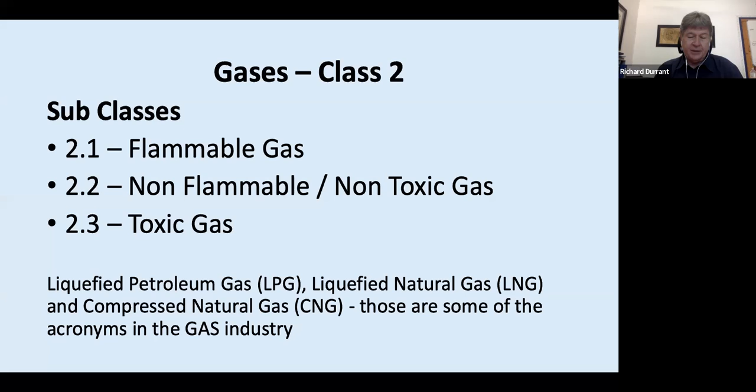And then there's the compressed natural gas, which is when you take the liquefied gas and you compress it, you put it into a container, for use in motor vehicles and other activities such as that. So those are just some of the different types of gases.

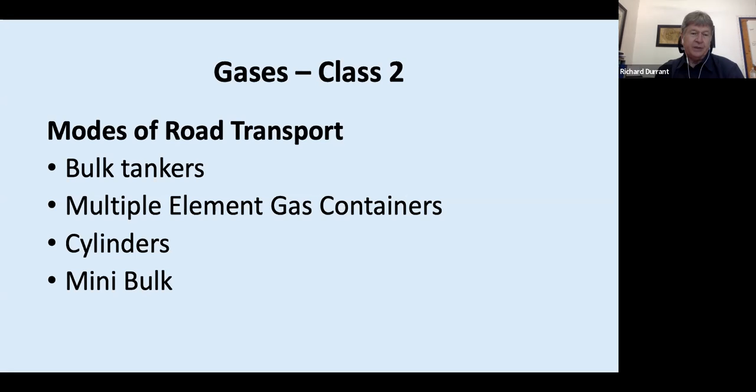They have an agreement with a company that actually builds the tankers, so they don't build the vessel. That vessel is built, and then it is taken by Tank Clinic and put onto the vehicle, onto the trailer, onto the axles. And then Tank Clinic sells it as a Tank Clinic tanker, but it's two manufacturers that build the equipment, and Tank Clinic puts it all together into the vehicle. Also very good quality. Cost-wise, probably a little bit cheaper than the imports. I don't know offhand what the costs are, but...

this vessel is designed as a high pressure vessel, and it's built from, I think, 12 or 15 millimeter thick steel, and they can hold up to I think 2000 something kPa, kilopascals - so very, very high pressure. All the pipe work is designed to operate at very high pressure. So it is really a work of art and a work of engineering.

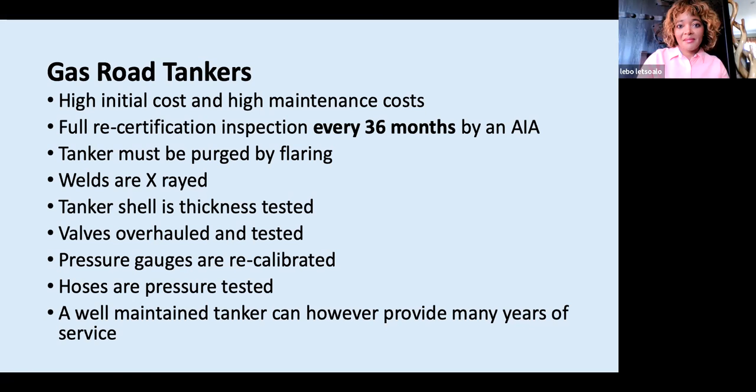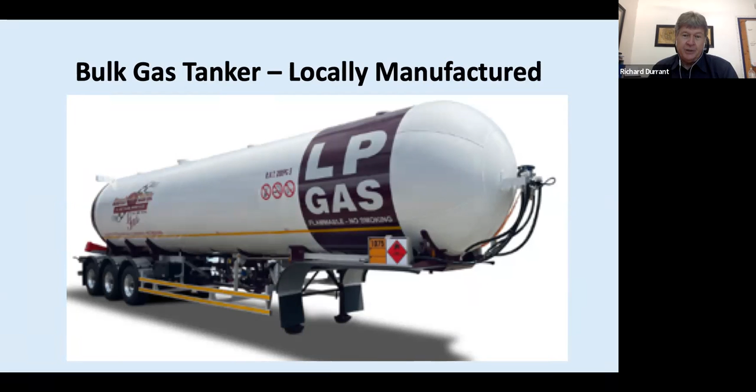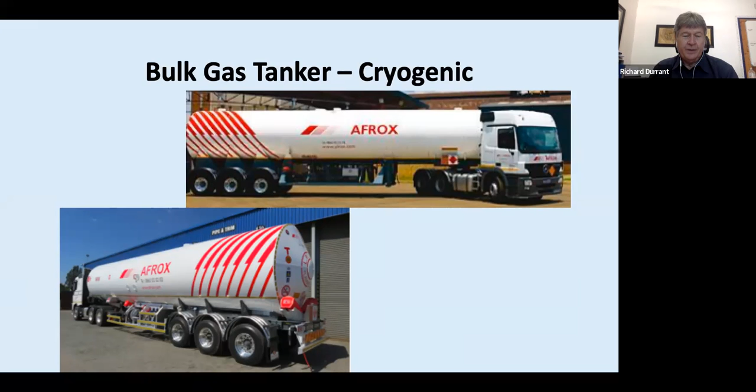Where these ones actually have got a similar vessel inside the cladding, but they have got an insulated exterior, insulated with a fiberglass type material, because some of these materials or gases that are transported in these tankers are at minus 150 degrees centigrade and more. So things like nitrogen, I think I've got a list of some of them.

So yeah, cryogenic means that it's running at a very, very low temperature. So the cryogenic liquefied gases are also known as refrigerated liquefied gases, and are commonly called cryogenic liquids. So the colder it gets, depending on the product, it then turns into a liquid. But as soon as you start releasing the pressure and the temperature, it then turns back into a gas.

And then cryogenic gases are cryogenic liquids that have been vaporized and may still be at a very low temperature. Cryogenic liquids are used for their low temperature properties, or to allow larger quantities to be stored or transported. So the cryogenic liquid can be used as a refrigerant as well. They are extremely cold with boiling points below minus 150 degrees. So they will boil at minus 150 degrees.

So extremely, extremely cold. Some examples are carbon dioxide and nitrous oxide, both of which have higher boiling points, and are sometimes included in this category. I must say up front, I'm not a cryogenic expert. It is a very specialized field. Afrox, Pure Gas, Air Liquide, these sort of companies are transporting cryogenic gases. It's just an example of a different type of gas and a similar tanker, but different.

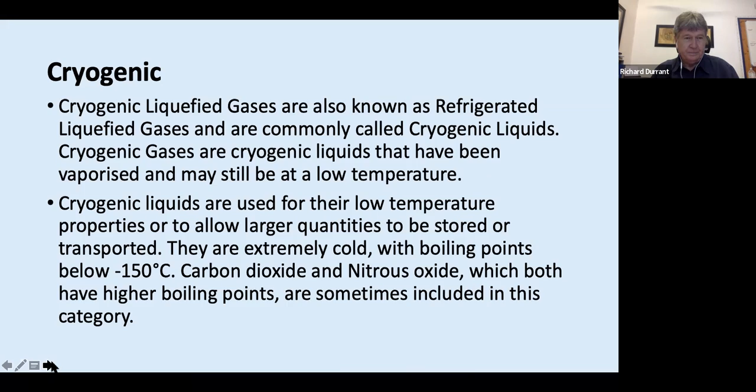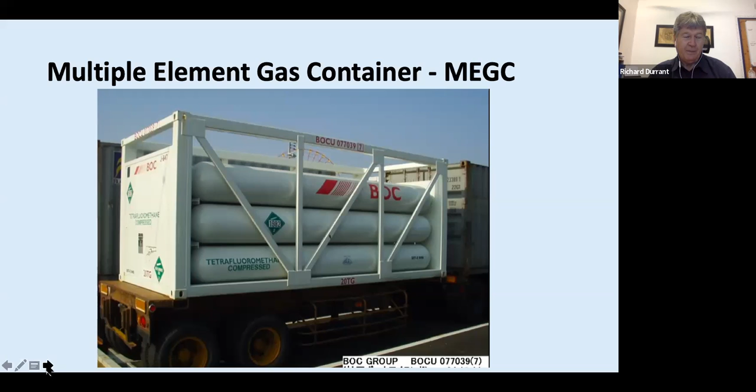So, as I mentioned earlier, one of the most popular gases that most of us have had some dealings with is liquefied petroleum gas, LPG, which has the United Nations number of 1075. And LPG is a mixture between butane and propane. Both of them are flammable gases. And I'm not a chemist, but they mix them depending on the qualities of the butane and propane, and together they mix into liquefied petroleum gas.

And some of the dangers of LPG and of a lot of these gases are that the vapors are heavier than air, and it'll spread along the ground and collect in low confined areas. So if there is an LPG leak, you can't see LPG. It's clear. You can smell it, but I'll touch on that just now. The vapors will drop onto the ground, and they will flow along the ground and go into drains and low areas.

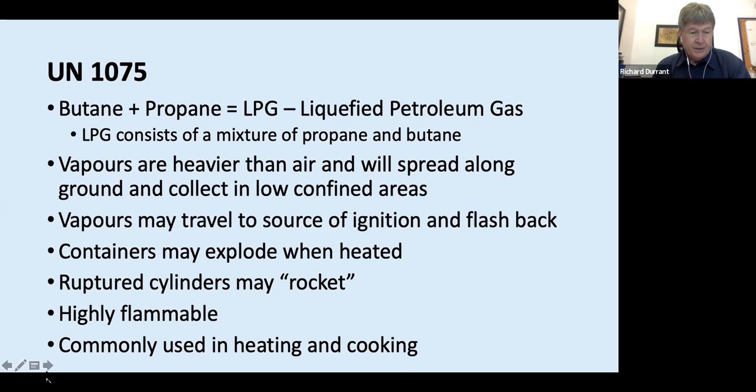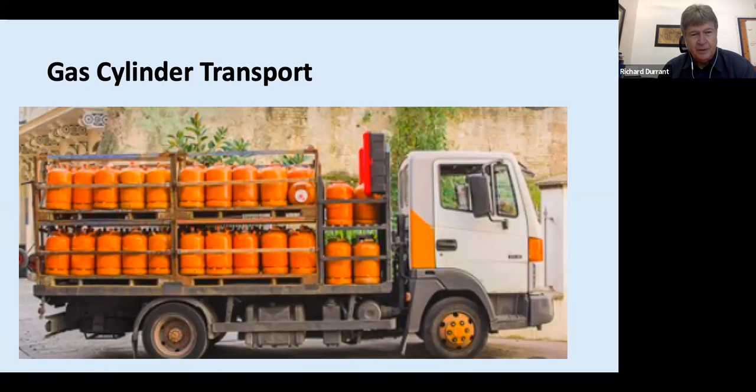There's no placarding on this vehicle. As we discussed at the last session, each vehicle must have placards on showing that it's carrying LPG with a UN 1075 number on it, etc. But that's quite a good example of smaller gas cylinders being transported.

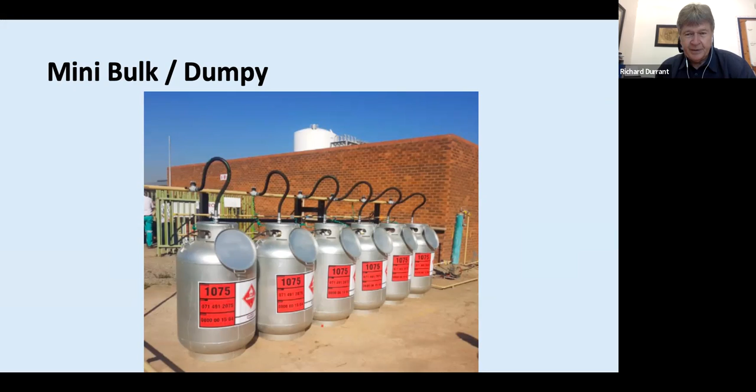But again, you'll see on these, they've got a foot, they've got a ring around the foot, around the base, which keeps the tank off the ground. And it's got a protection ring around the top, where the pipe couples into the cylinder. The valve itself is below that protection ring to, again, protect it from being knocked off. And I see these ones have got a lid that you can close over as well for further protection. So a very neat installation.

So if you are interested in getting into LPG, some of the background to LPG in South Africa, the availability. There are 6 fuel refineries in South Africa, of which 5 of them produce LPG. So there's a refinery in Cape Town, 2 in Durban, 1 in Secunda, 1 in Sasolburg. The only one that doesn't produce LPG is the Natref refinery in Sasolburg. Otherwise, all the other 5 produce LPG in various quantities.

So the article that I found says that those 5 refineries produce about 80% of the LPG consumed in South Africa, while the remainder is imported to compensate for the shortfall. My personal opinion is in fact the local refineries are not producing that much LPG anymore, and it's going to become more difficult because the Engen refinery in Durban, or Enref as they call it, is going to stop being a refinery. It's going to just be a storage facility for imported fuel. So they may be importing LPG as well.

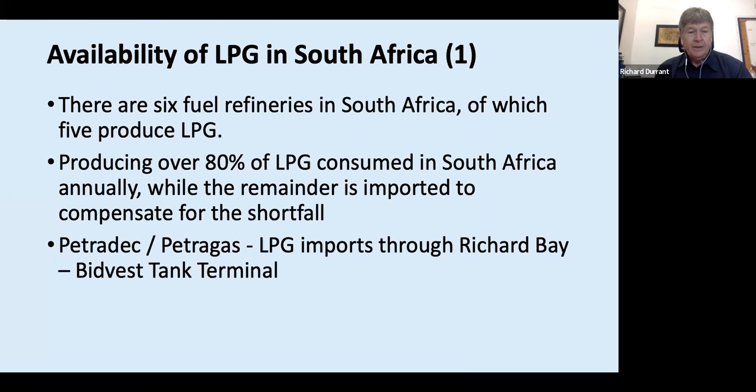Some of the others, and I'm not sure where they all get the gas from, Oryx, Easigas, Afrox, are purchasing LPG and marketing LPG. Afrox, I think they also produce some of their own LPG. Handigas is their brand, very well-known brand. Handigas has almost become a generic name for LPG. Afrox is the largest wholesaler and distributor of LPG in South Africa, that they distribute under their own brand, under their own name. Easigas is owned by a European company. Oryx is also a European company. So they are wholesalers and distributors of LPG in South Africa.

Then there's a very successful company, you may be aware of them, WASSA Gas. They're situated in Kya Sands in Johannesburg. A black woman-owned distributor of gas, has done very well. And if you want to get into the gas business, I suggest you go and talk to the owner of WASSA Gas. She can tell you some of the pros and cons of it, because she's had lots of experience. I, in fact, as a SQAS auditor, audit her operations, so I know the operation very well and it is very well run.

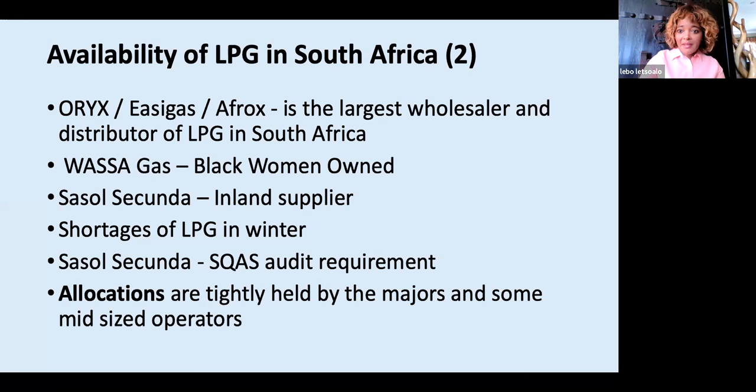Right, let's continue. So you might say, well, this is all around safety. But as I said right at the beginning, safety is critical. So that's why I'm spending so much time on safety. Transportation and handling of gas cylinders. Do not allow cylinders to slide or come into contact with sharp edges. As I said earlier, if that vessel, that tank, that cylinder gets damaged and gets punctured, you're going to have a leak, and that can be catastrophic.

Do not allow cylinders to overhang the side of transport vehicles. Again, if there's a side swipe or something like that, you bump into a wall, you're going to damage the cylinder. Do not drop cylinders or allow them to come into violent contact with each other or other hard objects. So with that picture of the industrial cylinders, they're all in those cages. They're all strapped into those cages so they don't rattle around and bump into each other.

Do not load or offload cylinders by means of electromagnetic cranes or chain slings. So again, chain slings can slip, etc. Make sure that if you are going to use mechanical means to lift them, that they are fail-safe. Electromagnetic cranes are not common, but if something fails and the magnet stops being a magnet and you drop a cage of cylinders, it's going to be a big problem.

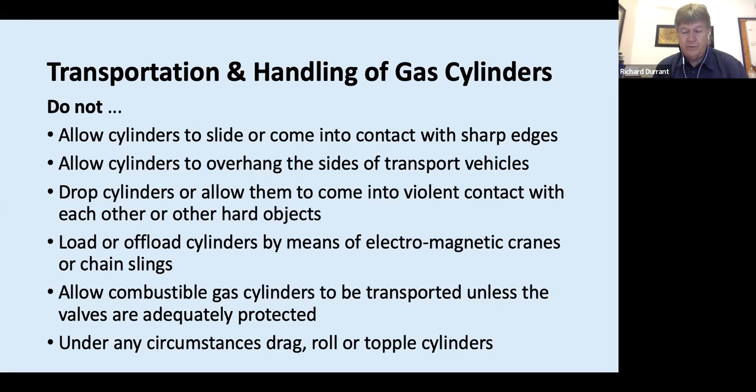Don't allow combustible gas cylinders to be transported unless the valves are adequately protected. I mentioned to you earlier the different ways of protecting, the rings or the caps on top of the cylinders; make sure they're always in position. And under no circumstances drag, roll, or topple cylinders. I've seen cylinders being rolled off the back of a truck and landing on the ground. You really don't want to do that, because all you need is that cylinder to get damaged or the valve to get knocked off, and then you've got the cylinder that's flying around.

Some of the do's: ensure that the cylinders are properly secured during transport. We've said that a few times now. Transport cylinders properly secured in a vertical position with the valve uppermost. So even if you're transporting 1 or 2 cylinders on the back of a bakkie, make sure that they're in a vertical position and they are tied to the headboard of the bakkie to stop them moving around. Keep dirt, oil, and other foreign matter out of the valves and safety devices.

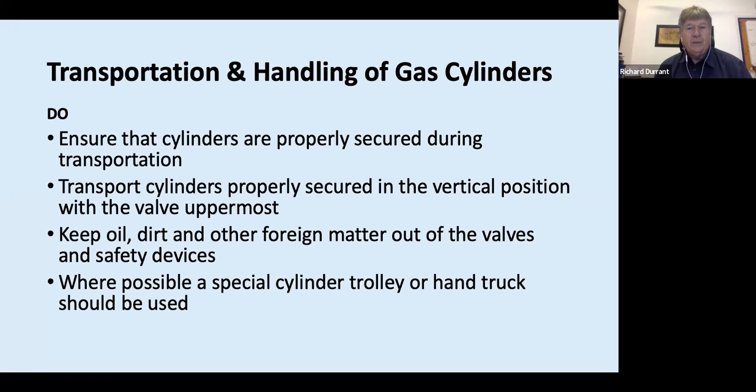And where possible, a special cylinder trolley or hand truck should be used when you're moving cylinders around. It's not that easy. They're very heavy and awkward, so you can hold them at 45 degrees and roll them on the ring at the bottom, but all you need is somebody to slip, and then you drop that on the ground and there could be a problem. So where possible, use a trolley. This is again just a reiteration. It's all around safety when you're handling gas.

Stench additive. If you've ever used LPG, you may have smelt it; it's a very unpleasant smell. That is an additive that they put into the gas. As we say here, LPG is practically odorless and colorless, which makes leak detection difficult. So like I said, you can't see it. And if they didn't put in the stench additive, you wouldn't be able to smell it. The small amount of stench additive, ethyl mercaptan, is added before the LPG goes to the market. So it's added as a safety precaution. So if there is a leak, you will smell it. You can't see it, but you'll be able to smell it. At least you know that there's a leak.

So that's again a safety requirement. The additive is non-corrosive, non-toxic, and the odor can be smelt in very low concentrations of vapor. So yes, if you turn on your stove and you leave it for 5 seconds before you light it, you will smell that odor come through very quickly. So again, a safety precaution.

So that's really the bulk of my presentation. And apologies, but it's all around safety.

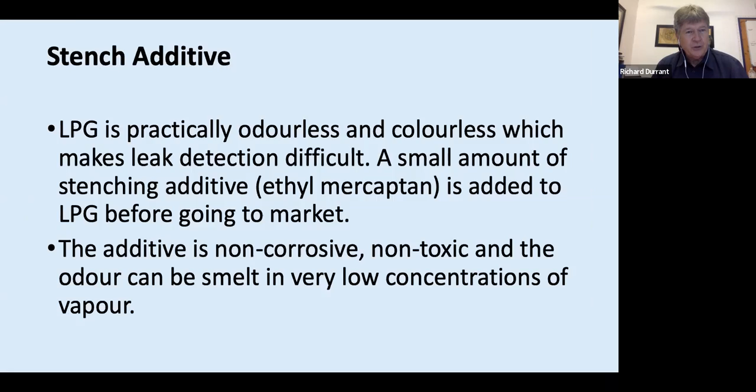But I've got 2 videos. I'm not sure if they're going to work, but we need to see whether I can get these to work. Otherwise, I'll have to distribute them. No, I don't think this is going to work.

The video was of a truck, an LPG truck, which was in the town of Worcester in the Western Cape in 2019, about 2 years ago. I don't know all the details, but the truck went into town. It was early in the morning, like 5:30 in the morning. It would appear that he turned down the wrong road and then decided to do a 3-point turn in the road. When he reversed back, he reversed into an electrical pole, which broke off one of the valves on the back of the tanker. With that, the gas started leaking. It didn't catch alight from the electrical pole.